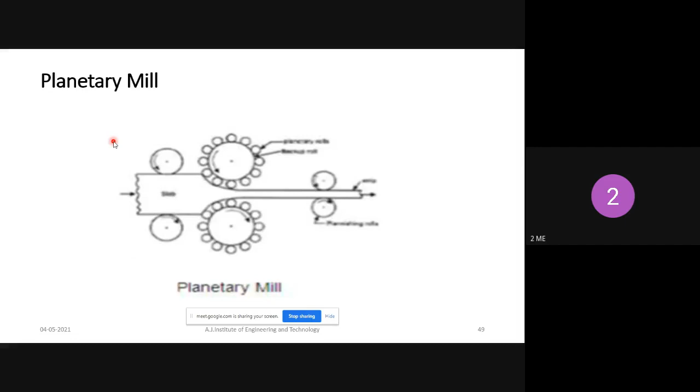Understood? So that's planetary mill. Next one is tandem mill.

In tandem mill, in a continuous way, you can reduce the thickness of the workpiece till the requirement. You can continuously use a number of rollers, and each roller has a different thickness, since in one pass it is very difficult to reduce the thickness.

In three roller mill also we can use this, also a continuous process. So in a single pass, the pass is single, but we are using a number of rollers. That method of using is called tandem mill.

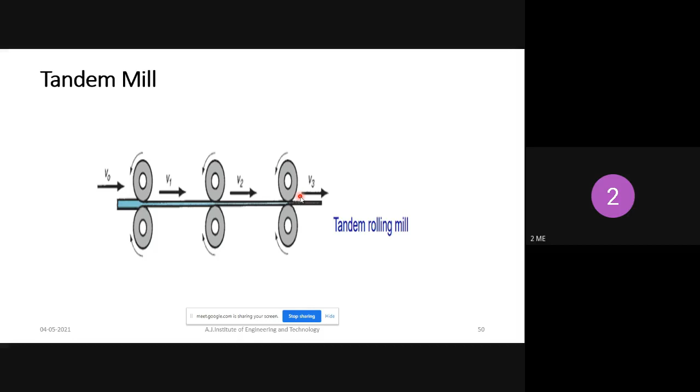Here, initially the gap of two rollers is high, and in the next setup the gap goes on reducing. So the thickness of the workpiece also reduces at the end. That is the working principle of tandem mill.

Next one is Sendzimir mill. Here you can observe the number of rollers. This method is mainly used to reduce large amounts of thickness in the workpiece in a single pass,

along with good accuracy. For that purpose we use this Sendzimir mill operation. So how does it work? The number of rollers gives compressive force to the workpiece.

So that number of rollers will give compressive force to the workpiece. Maximum amount of the workpiece will be reduced because of that compressive force of all the rollers, reducing the workpiece here at the top roller.

Also this roller speed is very high. Why? Because, as I already mentioned, diameter is inversely proportional to speed. Here a very small diameter roller is used, so the speed is very high, and you get high accuracy.

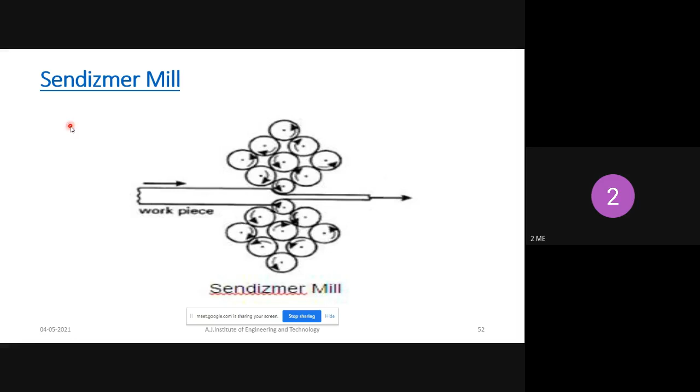So Sendzimir mill gives advantages: we can remove large amounts of material in the workpiece, along with good accuracy. So in a single method we are getting two benefits: maximum amount of material removed, along with good accuracy. This method is called Sendzimir mill operation.

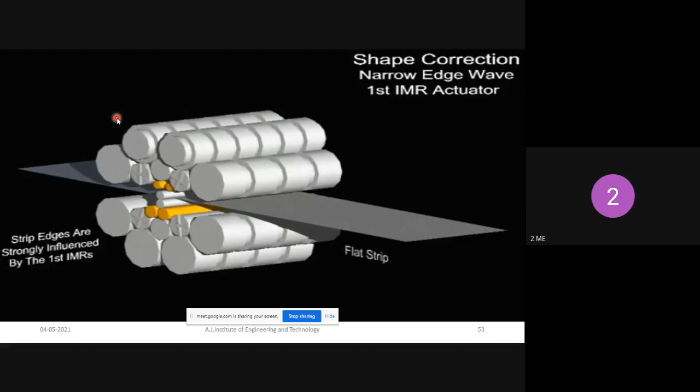This mill operation works like this. This roller is just acting for loading purposes; we use these rollers for loading.

The smaller rollers apply compressive force to the metal workpiece, and you get the required thickness of the workpiece. This method is mainly used to produce sheet metal.

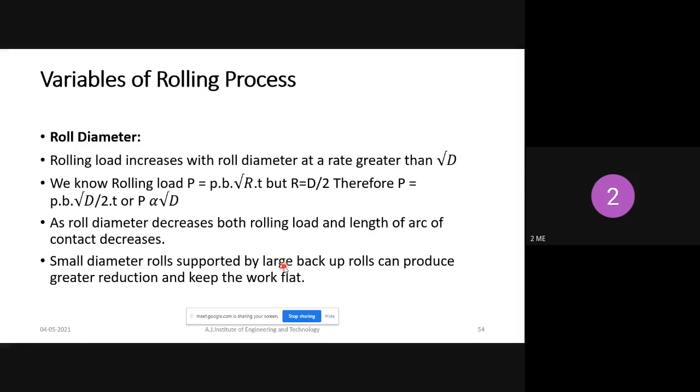Small diameter rolls supported by large backup rolls can produce a greater reduction and keep the work flat. This is based on the Sendzimir mill. The small diameter roll is just contacted with the workpiece, while the large backup rolls give support to the smaller roll, producing greater reduction and keeping the work flat, same as before.

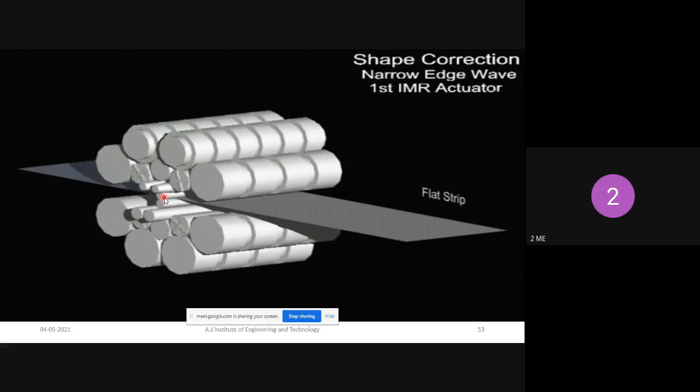Here you can observe these are the backup rolls, just giving support to the smaller roll. So the smaller roll is in contact with the workpiece, and you get the required flatness of the workpiece.

So these are the variables of the rolling process. First one is roll diameter. Second one is friction.

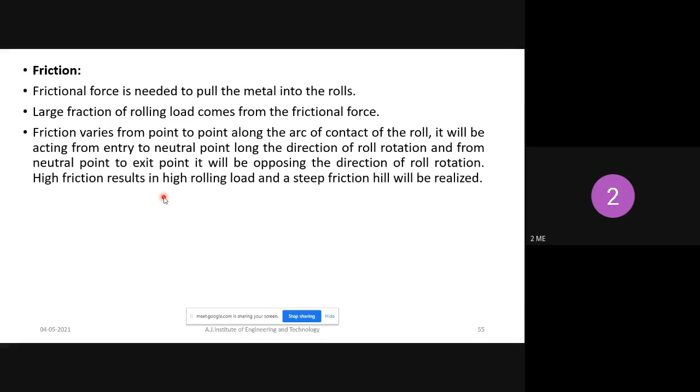Frictional force is needed to pull the metal into the rolls. A high friction rate is required to move the metal from the left side to the right side, which is the rolling operation. Friction is needed for rolling; only then will the metal move from left to right. A large fraction of the rolling load comes from the frictional forces, so friction is very important for the rolling operation.

Friction varies from point to point along the arc of contact of the roll. It acts from the entry point to the neutral point along the direction of roll rotation, and from the neutral point to the exit point it opposes the direction of roll rotation. This means friction is very low from the starting point to the neutral point. The maximum amount of load is applied at the neutral point, and after crossing the neutral point, the load decreases again.

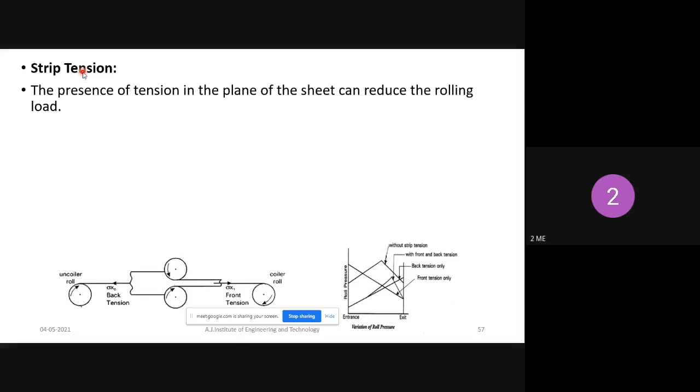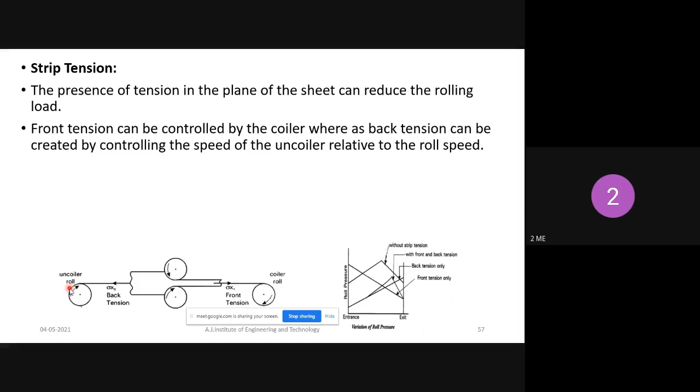Front tension can be controlled by the coiler, and back tension is controlled by the uncoiler roll. Tension reduces the wear of the rolls, improves flatness in the sheet, induces uniform thickness across the width of the sheet, and is used to shift the neutral point towards the exit plane. These are the advantages of strip tension.

Next one is pressure distribution in the rolling. How it is distributed, everything. So till now, what are the variables we discussed?

One is strip tension. Next one is deformation resistance of metal, friction, and roll diameter. So two things we already discussed: strip tension and deformation resistance of the metal, and one more is friction, and then roll diameter. These are the variables of the rolling process.

So the last one is pressure distribution. How pressure distributes in a rolling mill. The roll pressure P increases continuously from entry to the neutral point. So from entry to neutral point, the pressure gradually increases, and at the neutral point, the pressure of the roller is very high. Then after crossing the neutral point, it goes on decreasing continuously.

The peak pressure at the neutral point is normally called the friction hill. That is the peak pressure at the neutral point, called friction hill. I already explained what that is.

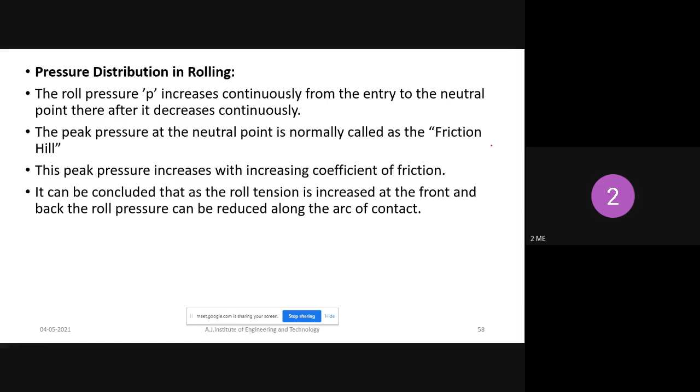It can be concluded that as the roll tension is increased at the front and back of the roll, pressure can be reduced along the arc of contact. So pressure is reduced after crossing the neutral point. As a result, the load required for rolling gets reduced. So these are the pressure distribution concepts.

So next, these are the different variables of the rolling mill. So first one is which one? Variables of rolling mill - roll diameter. So first one is roll diameter.

What happens with roll diameter? Diameter is inversely proportional to speed. If the diameter increases, the speed is also reduced.

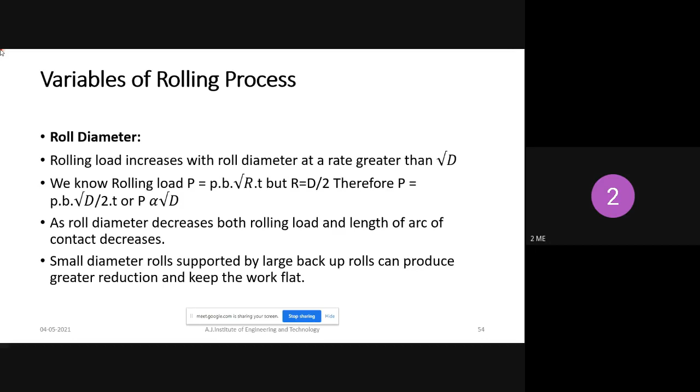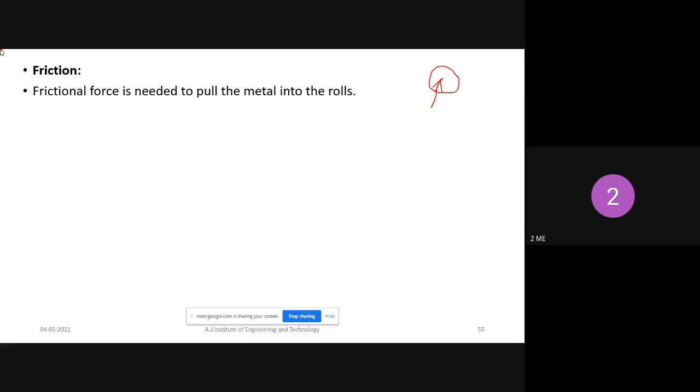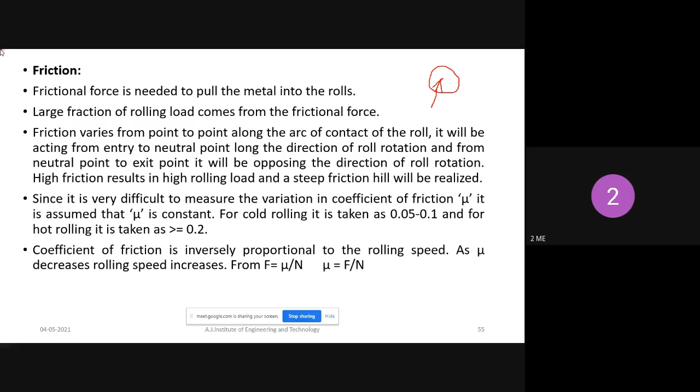Next one is friction. Friction is required for movement of metal from left side to right side. Friction is inversely proportional to speed; if friction increases, speed decreases. Smaller the diameter of the roller, the greater the speed, so friction is less.

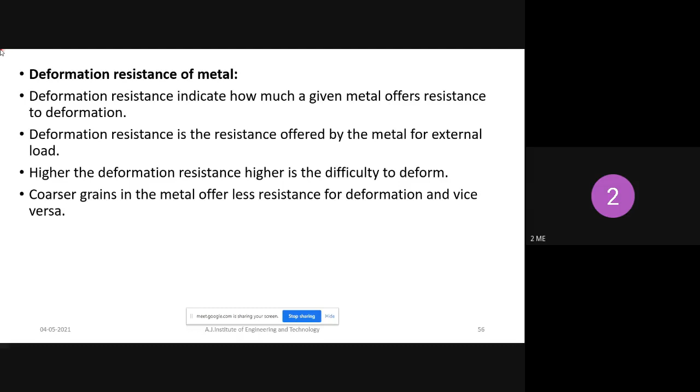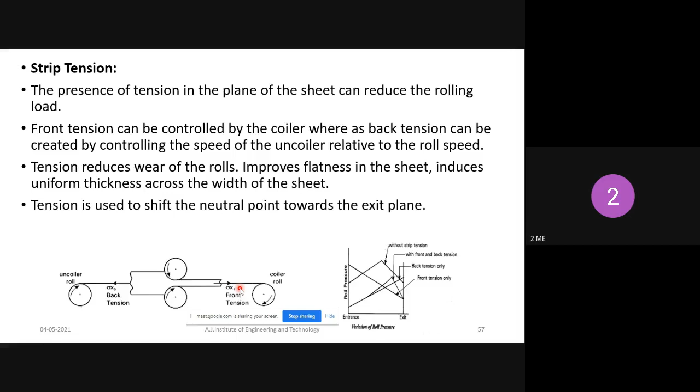Next one is strip tension. Higher the strip tension, less load is enough to reduce the thickness of the workpiece. To improve strip tension, we can use the coiler roller for tension. Tension is nothing but elongation of the material on both sides, the uncoiler roll and the coiler roll, so with elongation of the material, less amount of roll load is enough to deform the metal. That is strip tension.

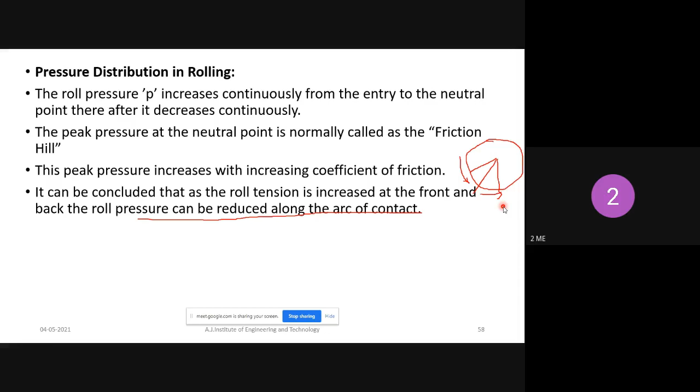Next, pressure distribution. Pressure increases continuously from the entry point to the neutral point, and from the neutral point to the exit point pressure goes on decreasing. These are the variables of rolling mill.

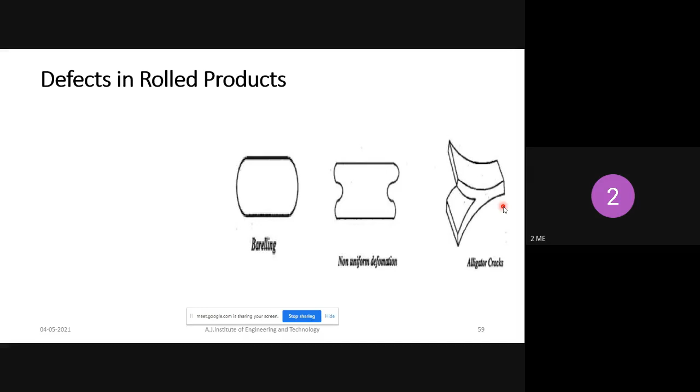Now we'll discuss the defects in rolled product. These are the defects that occur in the rolling product.

First one is surface irregularities. Surface irregularity occurs due to uneven load distribution along the surface of the workpiece, and friction between the roller and the workpiece. Sometimes, due to impurity in the material, rusting or scaling of the workpiece, you will also get surface irregularity problems in the rolled product. So defects arise at the surface of the rolled component because of impurity present in the material, rusting problems, and scaling on the workpiece.

Next one is structural defects. These defects change the integrity of the rolled product and distort the material. One such defect is wavy edge: if the roller mill is not exactly round in shape, then you will get a wavy shape of the workpiece, and at the end you get a wavy shape of the rolled product. That is called wavy edge.

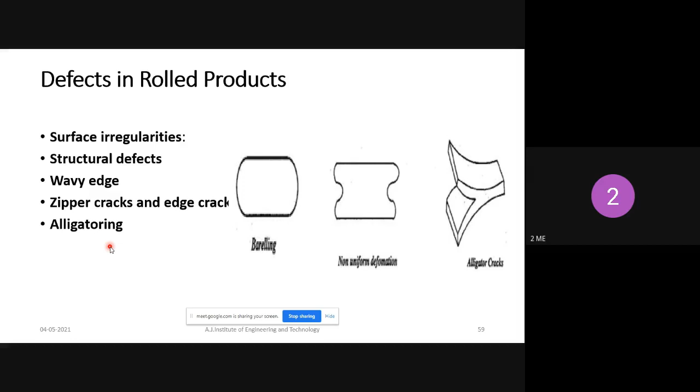Yes, sir. Okay, next topic is drawing operation. So what is drawing? Not your sketch pen and this one drawing - this is drawing operation.

Drawing is a metal working process. It is also one of the metal working processes, and it comes under the category of forming operation. Drawing is a metal working process which uses tensile forces to stretch metal.

Here tensile force is nothing but what? Different types of forces you already studied in the subject like mechanics of materials - different types of stresses. Can you tell me the different types of stresses? Compressive stress, shear stress, tensile stress. Okay, good - tensile stress, compressive stress, shear stress, and bending stress. These are the different types of stresses.

Drawing is a metal working process which uses tensile forces to stretch metal. Tensile is nothing but elongation of the material. Take one rubber band and apply load on both ends - what happens? It will stretch. That type of stress is called tensile force. If you apply tensile forces to that rubber band, it will stretch.

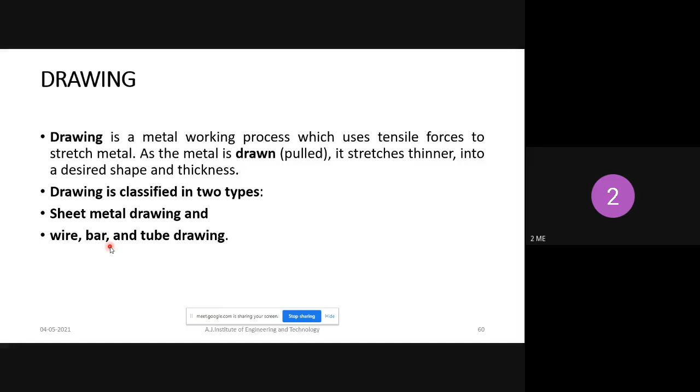Drawing is classified into two types: sheet metal drawing, and wire, bar, and tube drawing process. This is the bar drawing process. The lower die is stationary, and the upper die can be moved upward as well as downward based on the thickness, the final thickness of the workpiece.

This lower die is in conical shape, and the upper die is also in conical shape. At the end, this is the actual thickness requirement. Based on the thickness required of the material, you can set the upper die, which can be moved upward and downward. Once you set the upper die as well as lower die, it will not move.

This is the bar, total bar. The bar will be heated in a furnace and converted into red hot condition, then passed through this die. This bar will be drawn through this die, and you will get the required shape and the required dimension. That is called the bar drawing process.

We are applying pulling action, pulling this rod here. Based on that pulling force, this metal will pass through this die, and you get the required diameter of the workpiece. That is called the bar drawing operation. Understood, right?

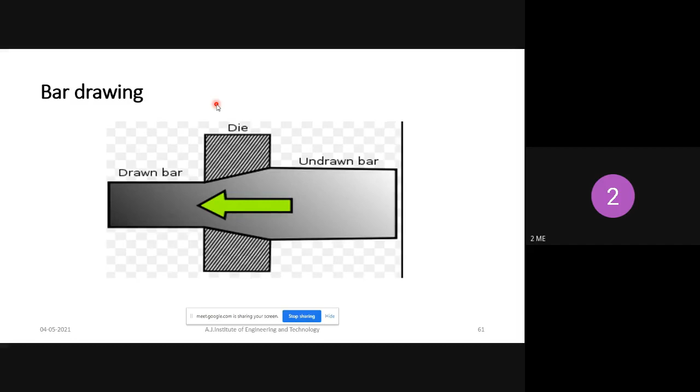Okay, next the tube drawing process. This tube drawing process is mainly used to produce tube shapes, hollow shapes, hollow pipes. PVC pipes and others we can produce with the help of this tube drawing process.

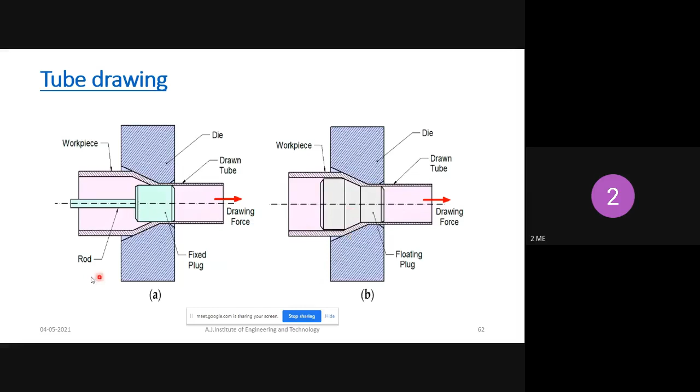And this is a floating plug, this is the rod. This rod is connected to one of the fixed structures. Here floating one, so no support device is required for this type of mandrel. These are the two varieties of tube drawing process. Today we will discuss tube drawing with the help of a mandrel.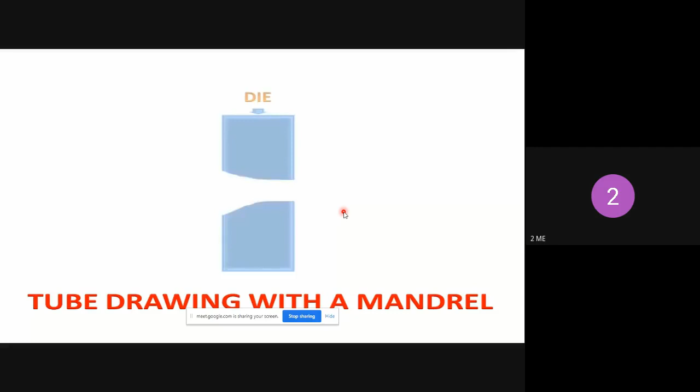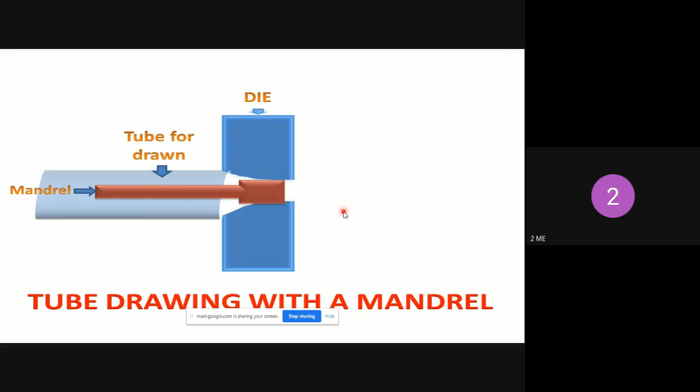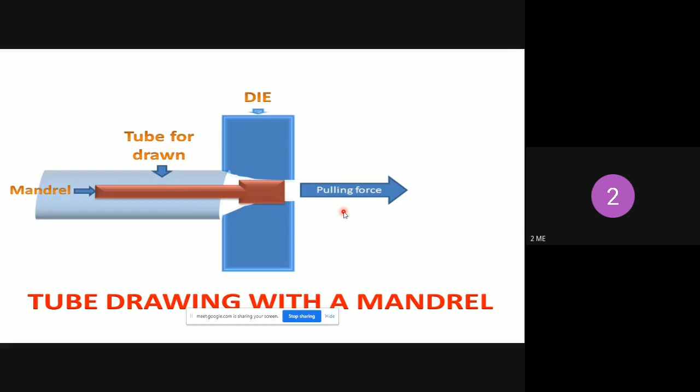We have a die with an opening and a mandrel. On the mandrel we have a larger tube diameter which will be drawn into a tube. There will be a pulling force which will pull this tube from the die, and when the pulling force pulls this tube through the die, the mandrel will restrict the shape of the tube to the limited range, and the tube will form in the desired shape and size. This tube will be our final product.

Pulling force will pull the larger diameter tube on the mandrel and in the die, and the final tube diameter we can get from the tube drawing process. So this is the working of tube drawing with the help of a mandrel.

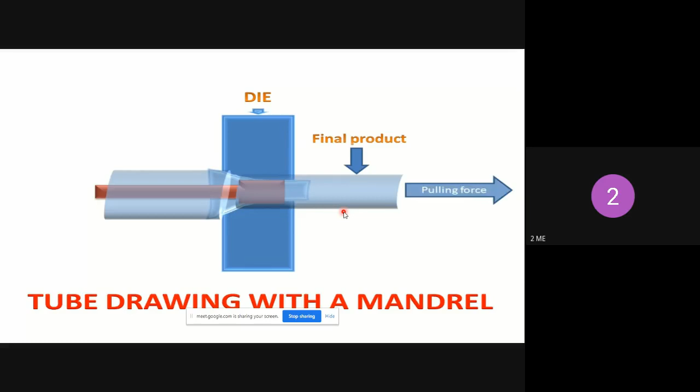So this is the working principle of the tube drawing process. Next one is the wire drawing process. Here the workpiece is continuously supplied, and different thickness can be set with the help of different number of dies. This is also a continuous process, similar to the continuous rolling process. This is called the wire drawing process.

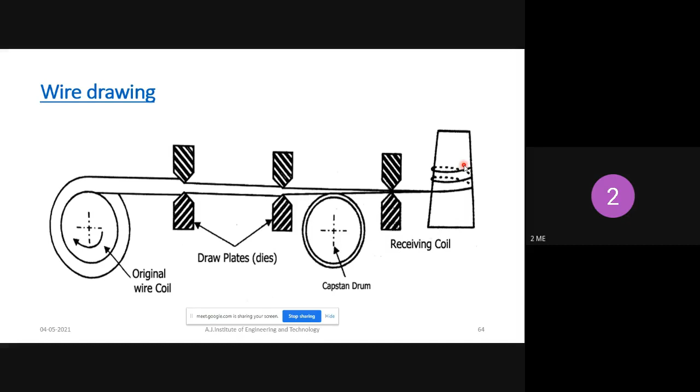So here we are using a number of dies. The thickness usually goes from 10 mm to 5 mm, 5 mm to 2 mm, 2 mm to 1 mm, like that continuously reducing the thickness of the workpiece with the help of this drawing process. At the end, the reduced thickness workpiece we collect, and at the end we get the wire shape of the workpiece. So this is called the wire drawing process.

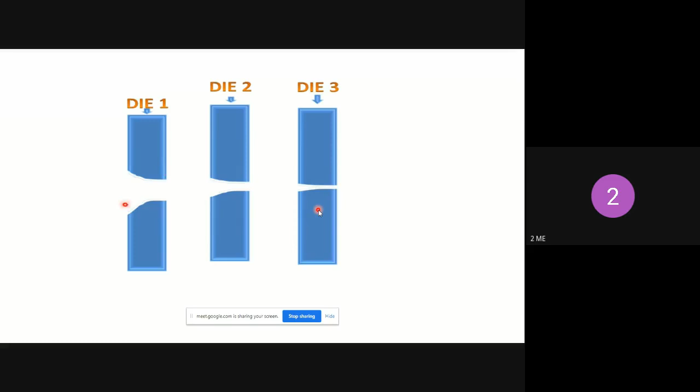Today we will discuss the wire drawing process. Firstly, we will discuss the parts of the wire drawing process. We have die 1, die 2 and die 3. This die has a larger inner space, this die has smaller, and the third die has smaller space as compared to the first and second die. Space is very small in die 3.

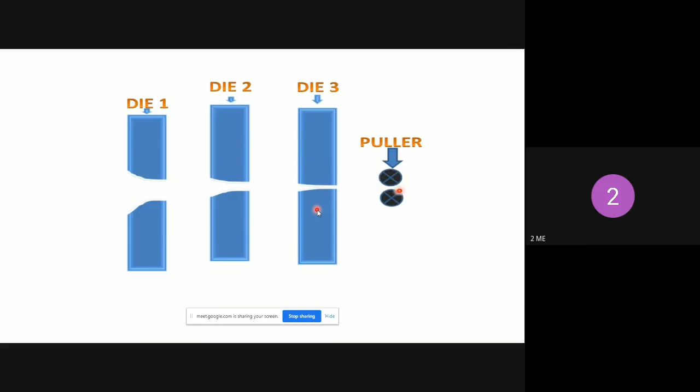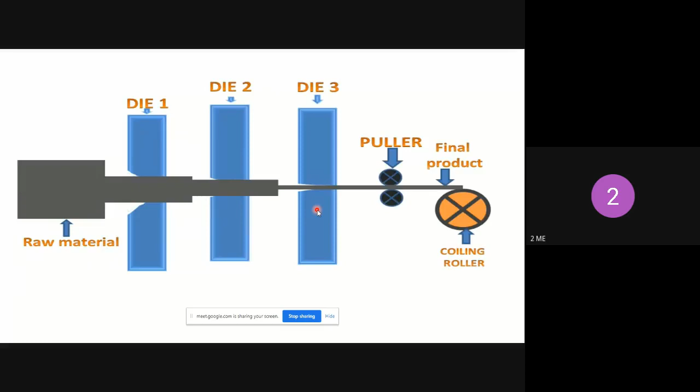Now we will see the working of the wire making process. When raw material travels through the first die, the diameter or thickness will be decreased, and the final product will be made like this.

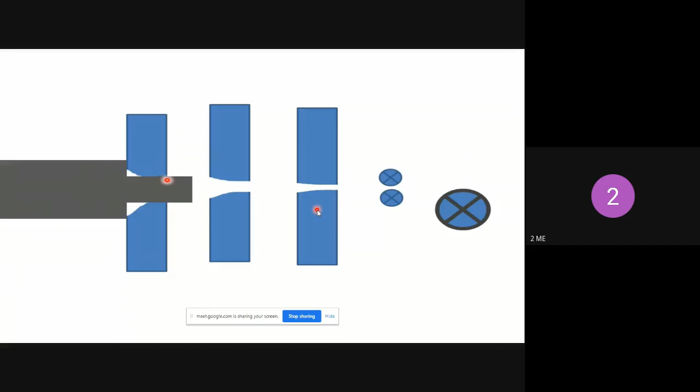When this travels in the second die, again the diameter or thickness of the raw material will decrease. And when this material travels from the third die, wire will be made, and this will coil on the roller. The roller will rotate, the puller will pull the wire from the raw material, and coiling will take place on the coiler. From this process we can make wire of the desired size. These dies are used for the desired product and thickness of the wire. So this is the working of the wire making process.